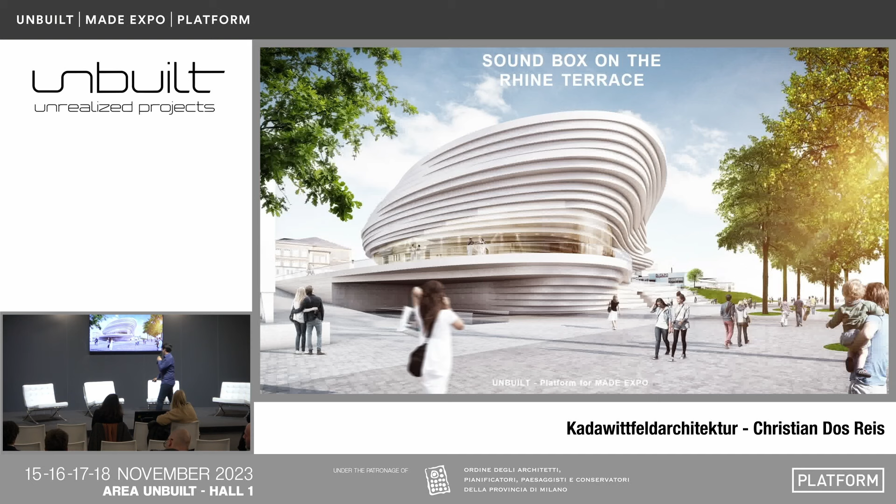My name is Christian Dos Reis. I work at Kadawittfeldarchitektur, and I'm very excited to talk to you about one of our unbuilt projects, one that's also near to our hearts. It's the Soundbox on the Rhine Terrace.

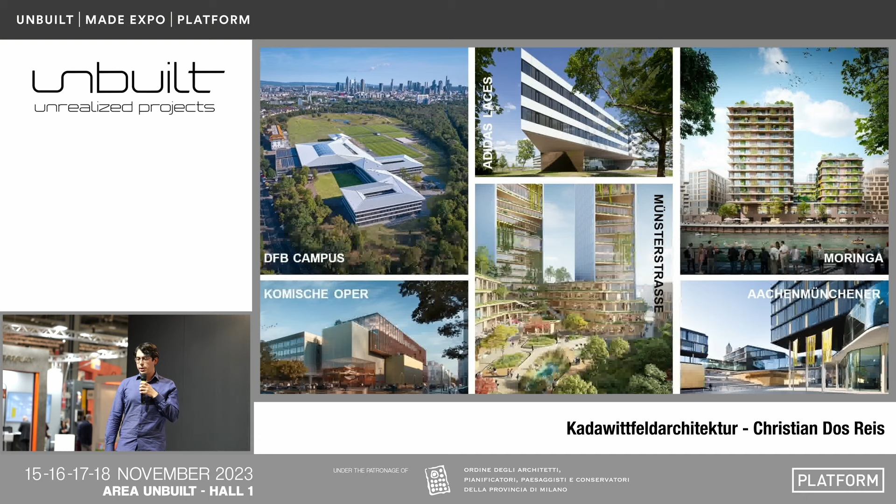Before I start, I'd like to talk a little bit about our office. We are a German-based architecture office founded in 1999 in Germany and Austria. We have grown to over 180 employees in locations in Aachen, Berlin, Munich, and more recently also in Cologne. Our project portfolio spans a variety of typologies, from offices and skyscrapers to educational buildings and schools, and also many cultural buildings.

One of our most recently completed projects is the DFB campus, facilities for the German Football Association in Frankfurt, as well as right now in planning the Komische Oper in Berlin, an opera concert hall.

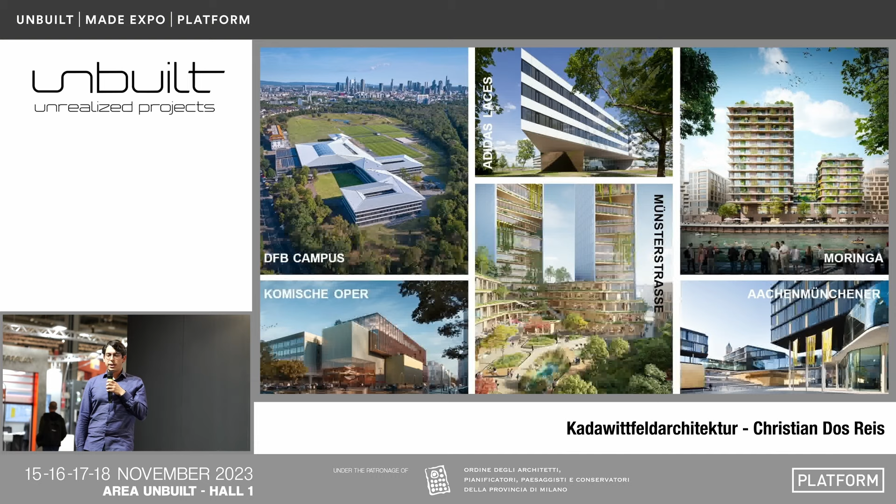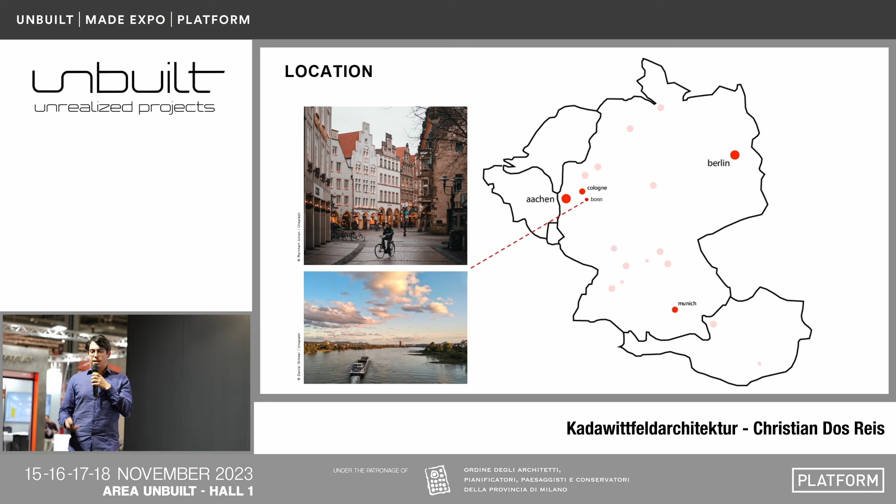In the thematic of cultural buildings and concert halls, I'd like to present the Beethoven Concert Hall in Bonn. Bonn, during the Second World War, was in West Germany, and this was the capital of West Germany, while Berlin was the capital of East Germany. It is located close to Aachen and Cologne, so many of you may have visited already, as well as the Rhine that flows through the city. It is also the birth city of Ludwig van Beethoven, which thematically is the point of the concert hall.

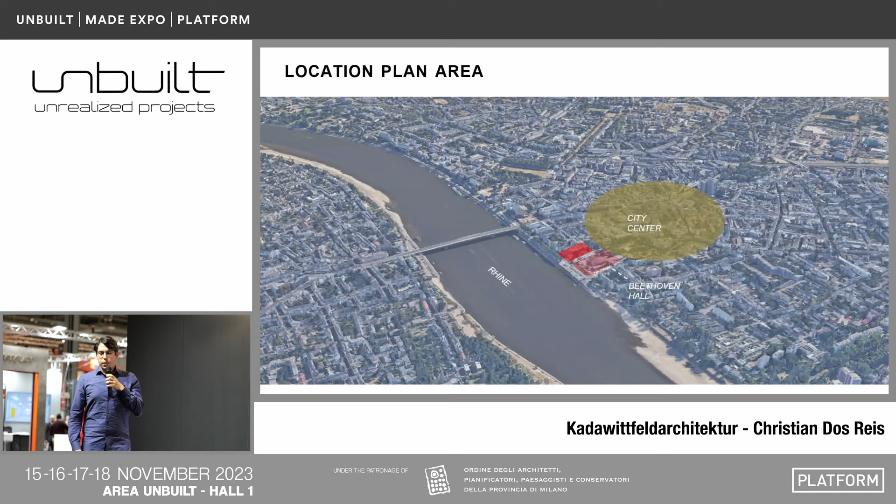I want to talk a little bit about the plan area and the project and the competition itself. The competition was set for 15 architecture offices internationally and was written out in 2014, divided into two phases. It took place in Bonn, close to the city center, and on the red area you can see is our plan area right next to the existing Beethoven Hall. Right next to it is flowing the Rhine River.

Interestingly enough, on the area we have the Rhine level, the shore level, and the city level, which have weathered several floods in the 1990s as well as in the 1800s, where the water rose above 5 meters.

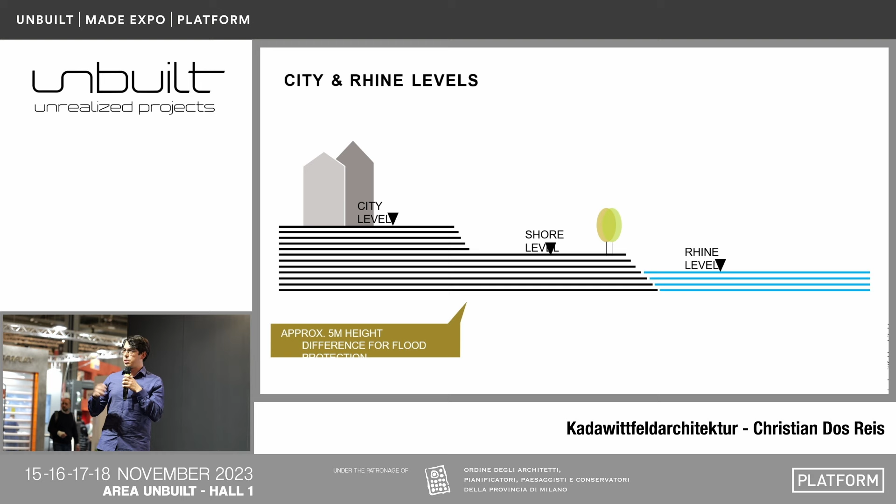So you can see the existing Beethoven Hall to the right, the plan area to the left, as well as the avenue that runs parallel to the Rhine, and the Kennedy Bridge that connects the eastern part of Bonn with the western city.

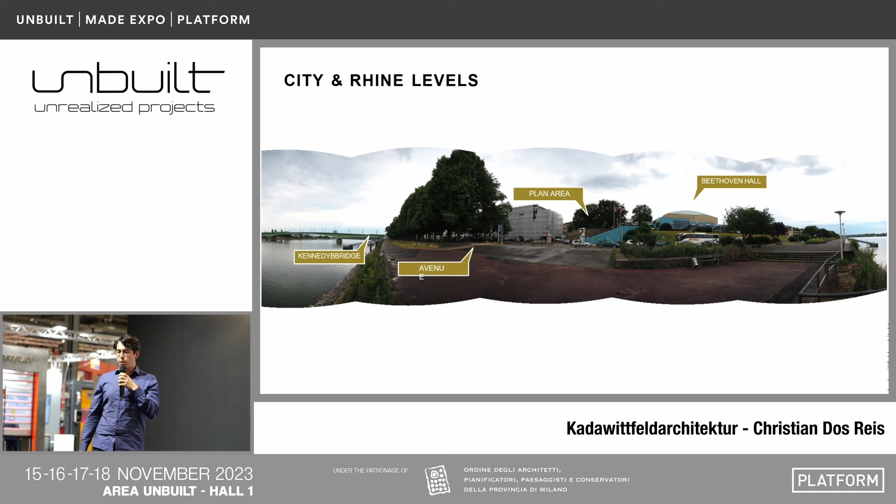Not to confuse, on the right we have the Beethoven Hall built by Siegfried Wolske, as well as the landscape planning done by Heinrich Raderschall. It was constructed and finalized in 1959 and went through an extension period in which they added seminar rooms to the left of the Beethoven Hall.

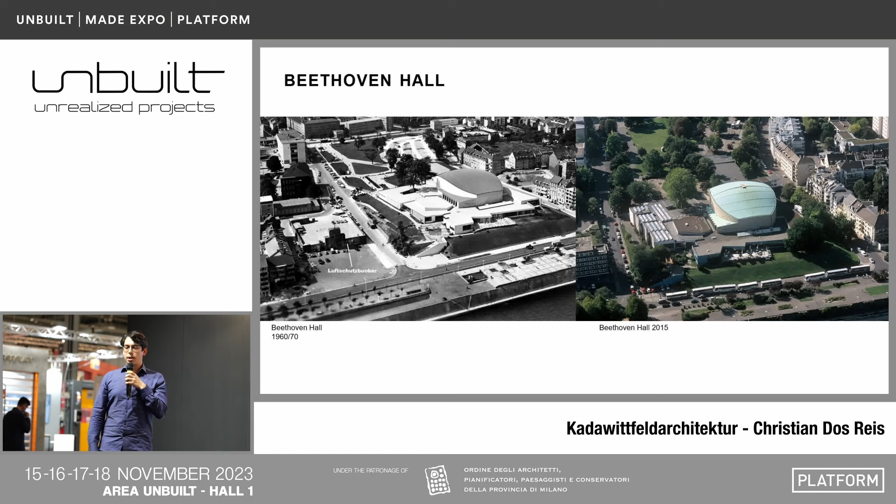On the left-hand side, where the plan area is situated, there used to be a bunker, which was then overbuilt. It was part of the competition as well to see how we can deal with a basement that used to be a bunker.

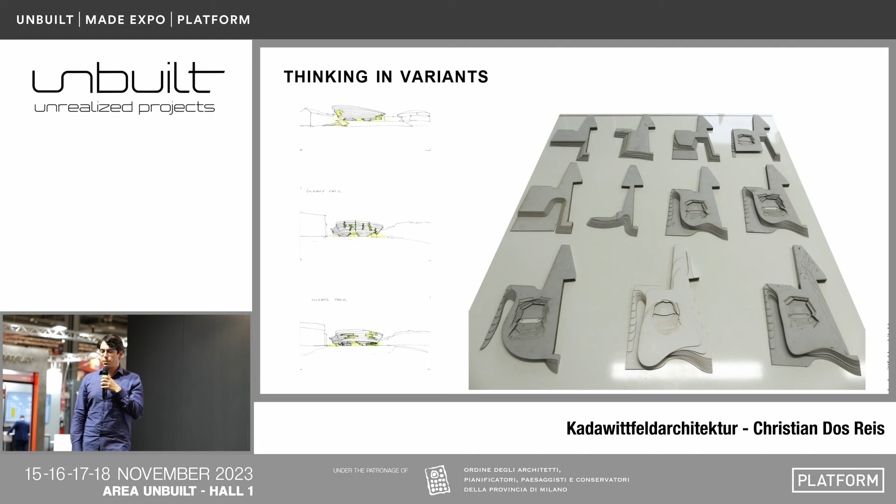For us in the office, we started relatively early with sketches and building models to try to find out what's the most suitable landscape to carry on from the existing Beethoven Hall. That brought us also to start mocking up the facade in model studies.

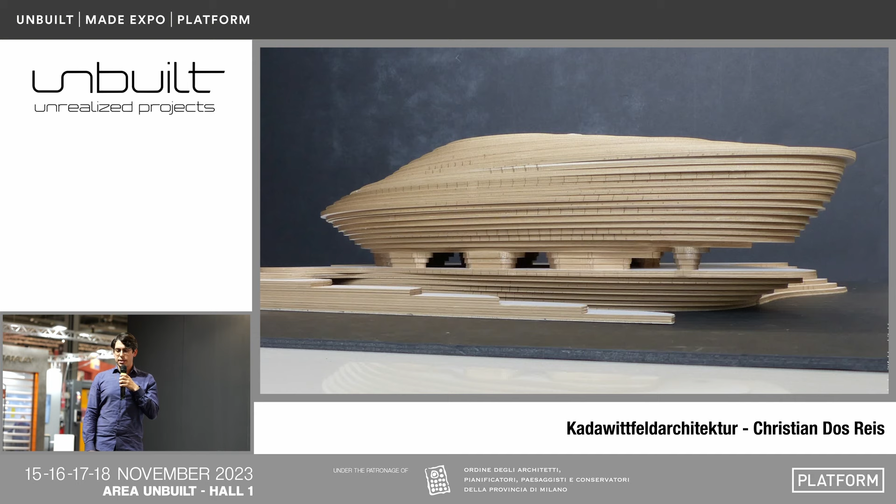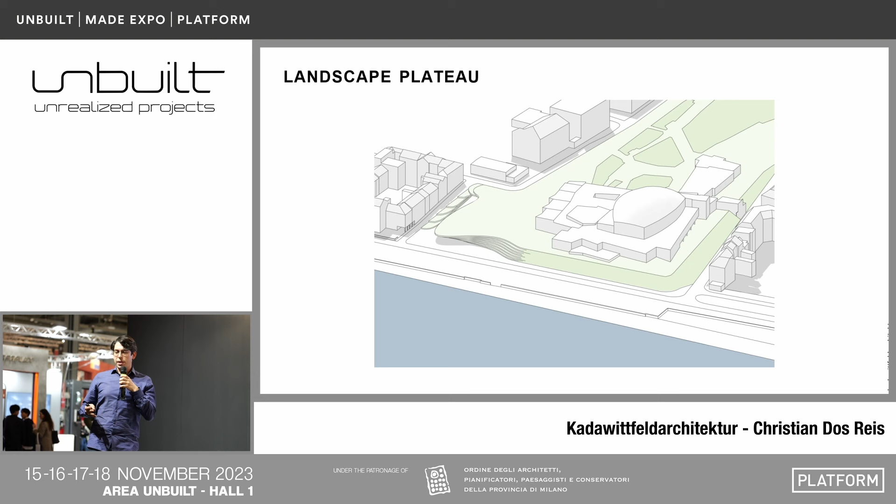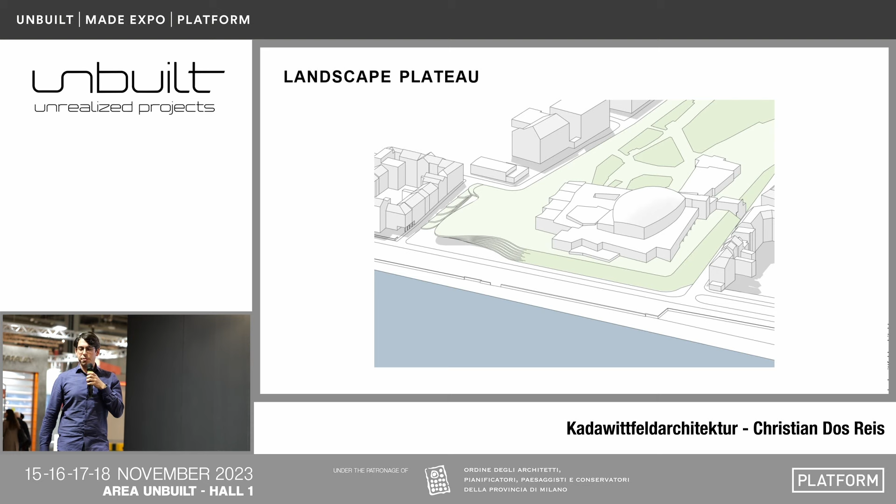Of course, as it being a concert hall, it's very important to know how you set a building that is respectful of the height differences, once with the Beethoven Hall to the right and a residential area to the left. So we had the idea to use the Greek amphitheater as an inspiration and set the concert hall down below, so that if you look at it from the avenue area, the concert area where the instruments would be playing is actually at the same level as the avenue and the riverbank.

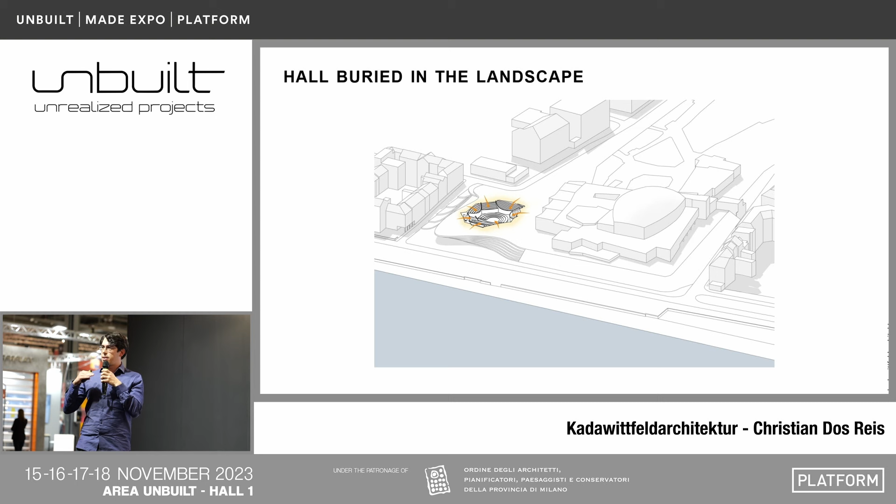So this is what it looks like in this scheme. You have the landscape that plays on top of the plan area, the hall that gets inlaid into the ground, as well as the shore and the Rhine right next to it.

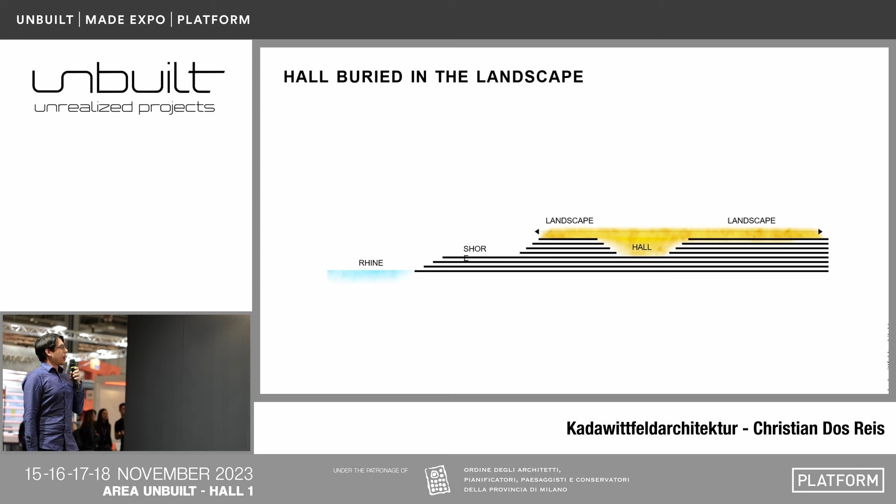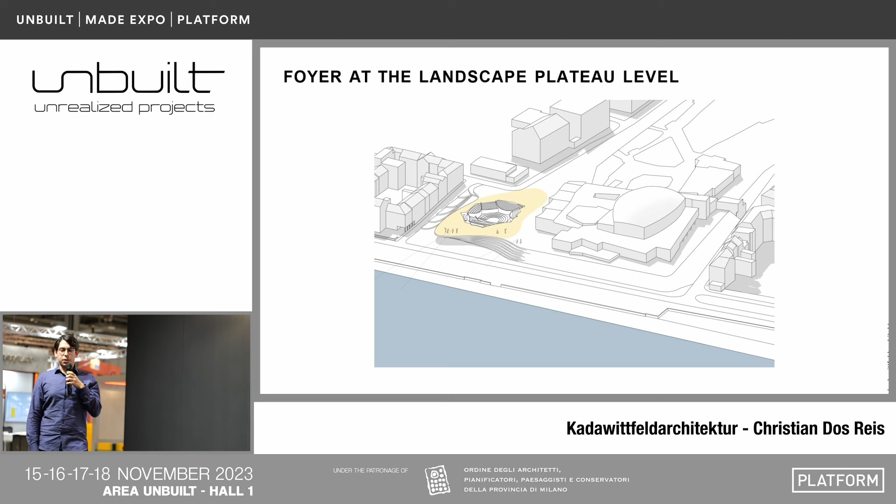This makes it possible to have a foyer that is integrated to the upper plateau level that is connected to the inner city of Bonn, as well as then having great sights over the river Rhine into Bonn itself. Now, of course, how do you close it all off?

We've played with relatively organic structures for the plateau itself. We took inspiration from the river and played a little bit with the musical instrument theme, taking from a string instrument the corpus and making it also as a sound body to put on top of our concert hall. This also looks like a conch or shell that has been formed by the river and taken its organic shape.

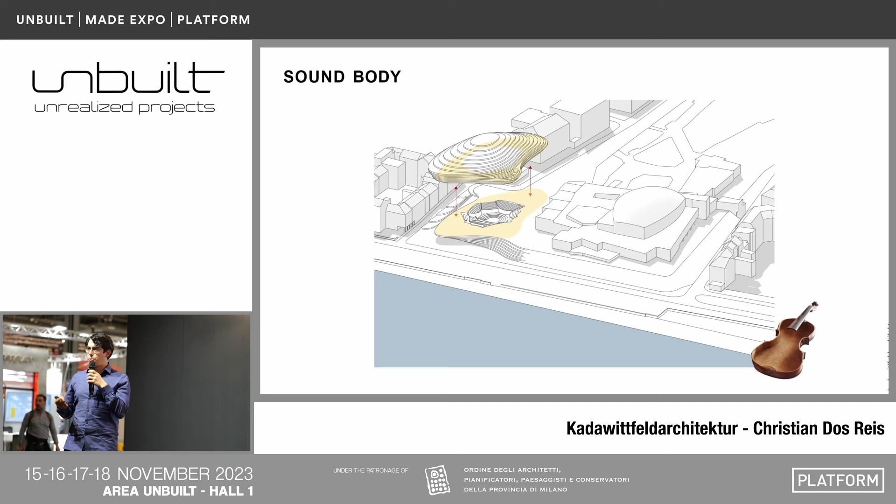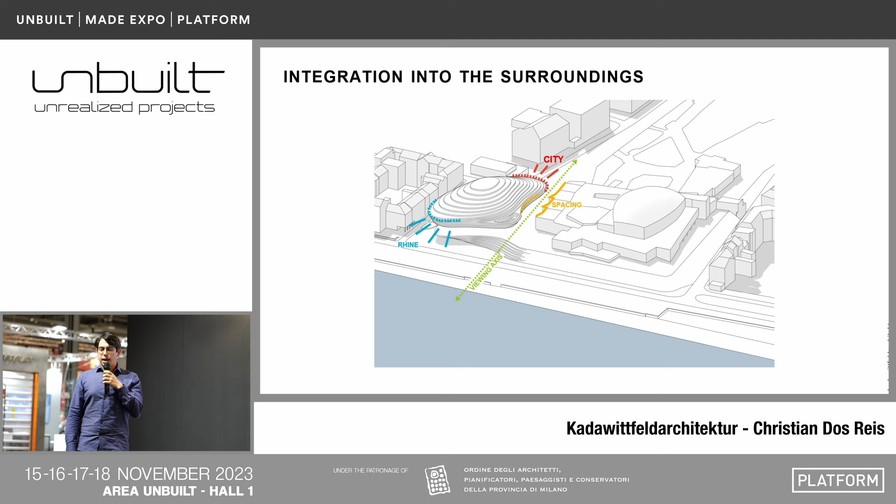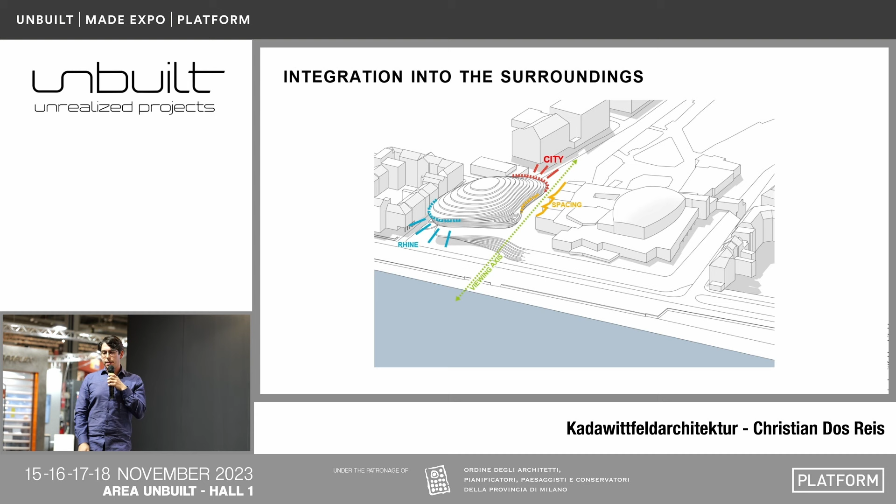This makes it possible to have exciting views from the building to the city, also a respectful space between the existing Beethoven Hall and its new concert hall. We keep a viewing axis to the inner city, as well as possibility of many viewing angles towards the Rhine, wherever you are inside the building.

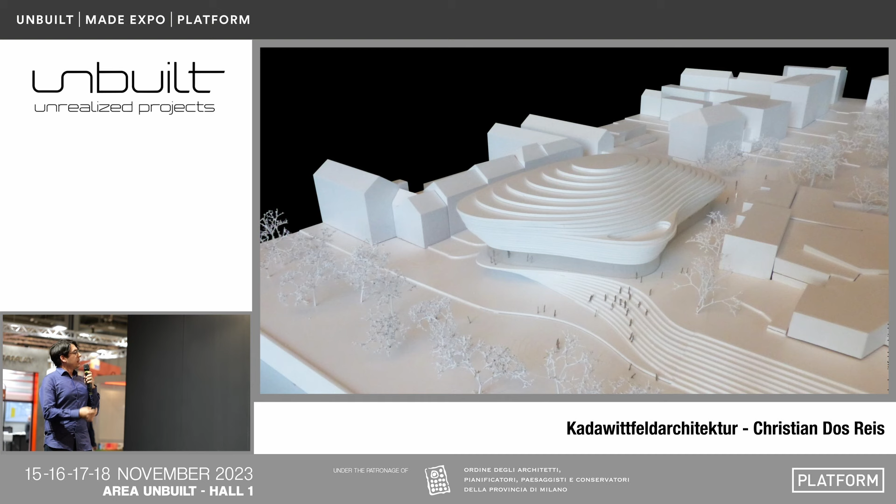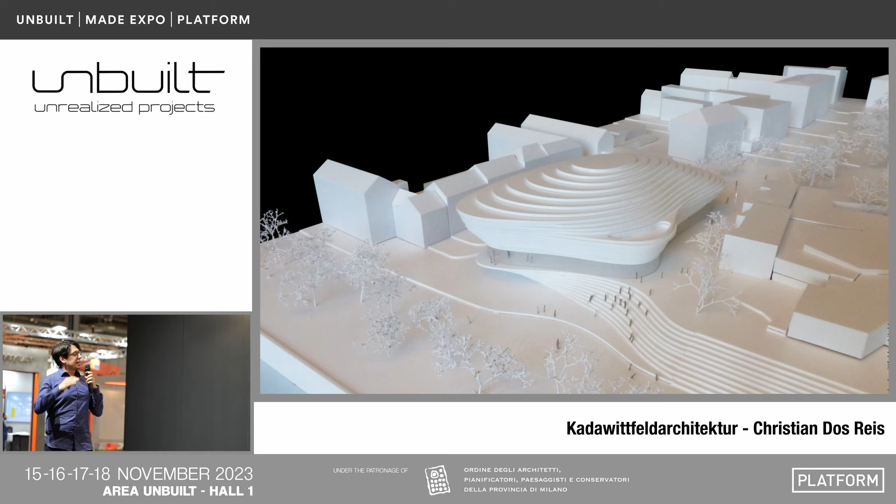So this is what it looks like in the model. You can already see, so if you are in the avenue, it lends itself to be very open. It's really a natural flow where people can enter the building and just go up the step-like staircase, where you are greeted first with a glass facade and then the building shell on top.

It also is very respectful with its surrounding buildings, as well as the Beethoven Hall that's right next to it, and it is possible to connect both. Of course, it wasn't realized, but we had plans for underground connections or elevators, which would all just make it possible to create one big musical campus in the theme of Ludwig van Beethoven.

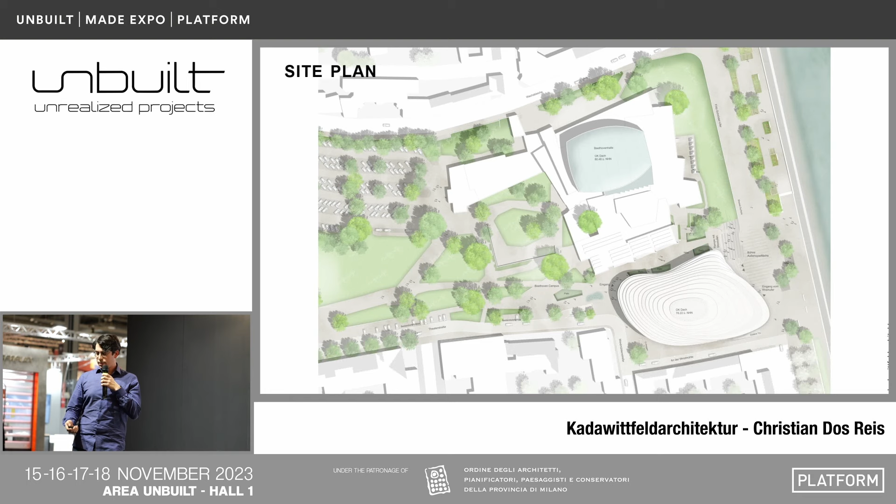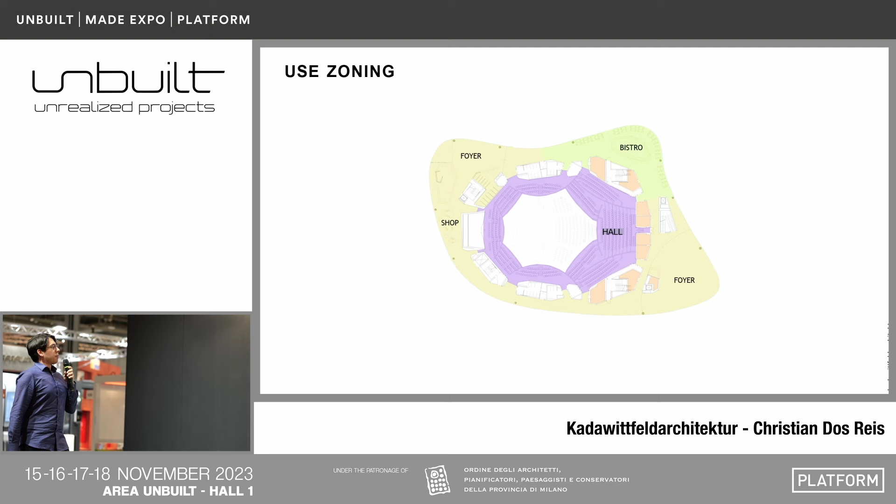One important aspect of the competition was also to have a very multifunctional building, and we decided to use its foyers that are surrounding the concert hall to be flexible. So you have the possibility of having foyers that can be smaller, more intimate concert areas, a bistro area that is flexible to be put wherever the client would desire.

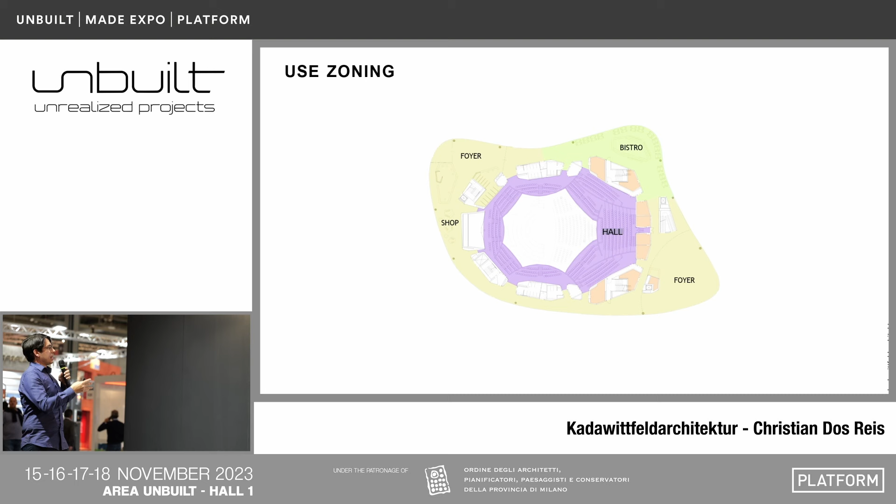And we would arrange all of the important facilities for wardrobe, artists, instruments, and technical facilities as close as possible to the hall. So you get a very concentrated building that is actually well optimized.

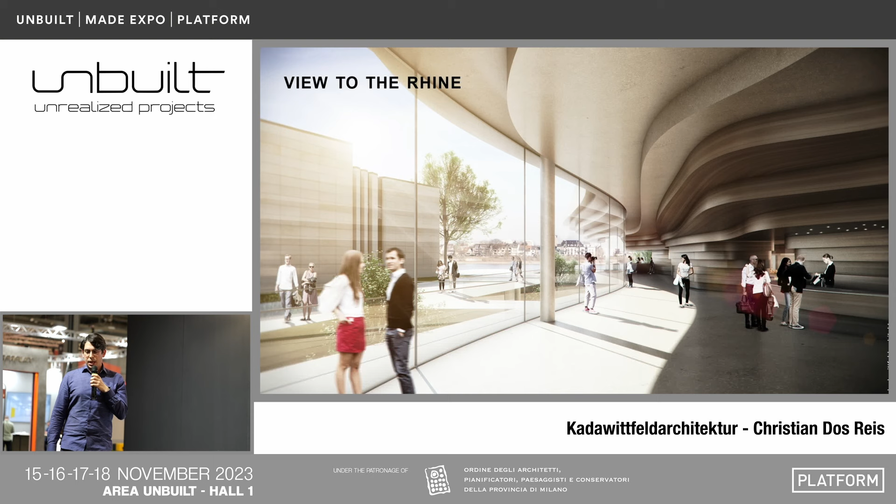This is what it looks like from the inside. So we've just entered the building, we've passed the ticket shop, and on the right-hand side we have the wardrobe entry. The language of the facade is also reflected on the inside.

You have the stepping stones now inverted that were building up on the outside, now building down. And wherever there's an entry necessary to go either to the concert hall itself or to the artist's room, the flow opens up for you to go into those rooms. And already on the side you can see an indication of the Rhine.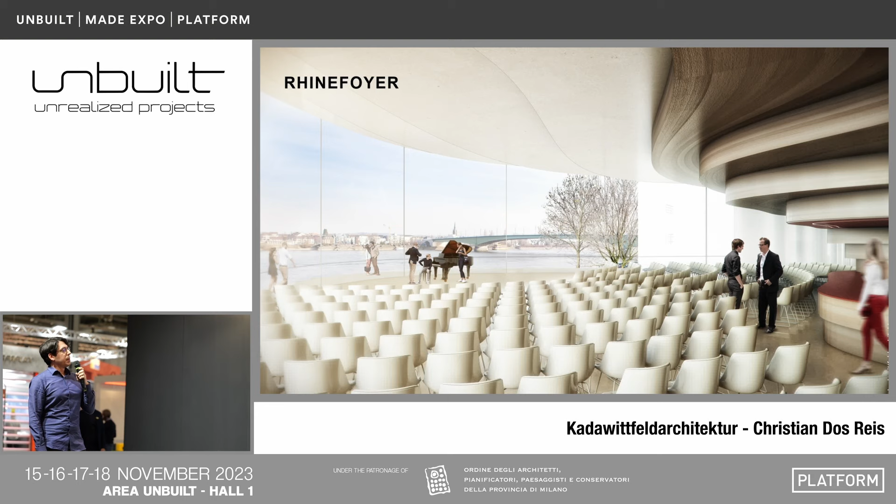And the deeper you go, if you flow around the concert hall, you get this view to the Kennedy Bridge, to the Rhine River, and of course again this multifunctionality of these rooms where you can put up to 100 people in these foyers, or make galas and dinner seatings, which is all possible.

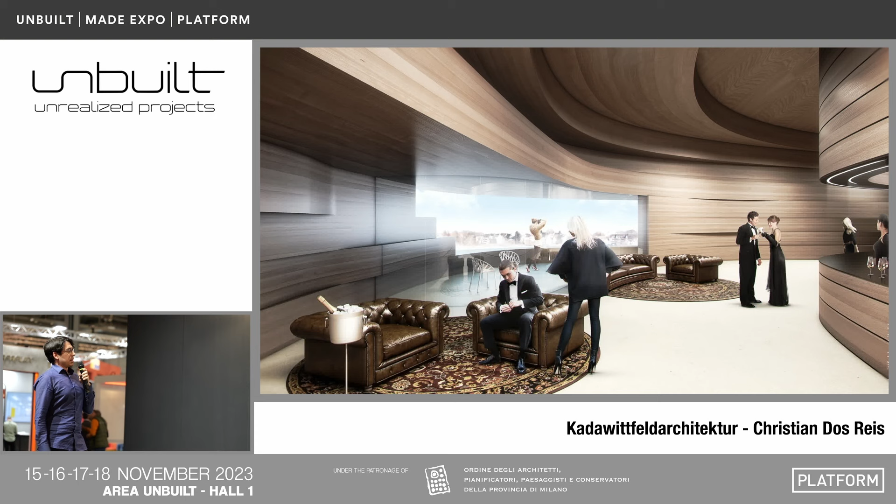And once you go up, this is the balcony that I just spoke of. We have the VIP area, in which you have the same thing, where this is the only area that has the balcony, but the flow itself just makes this room very nice just to be inside.

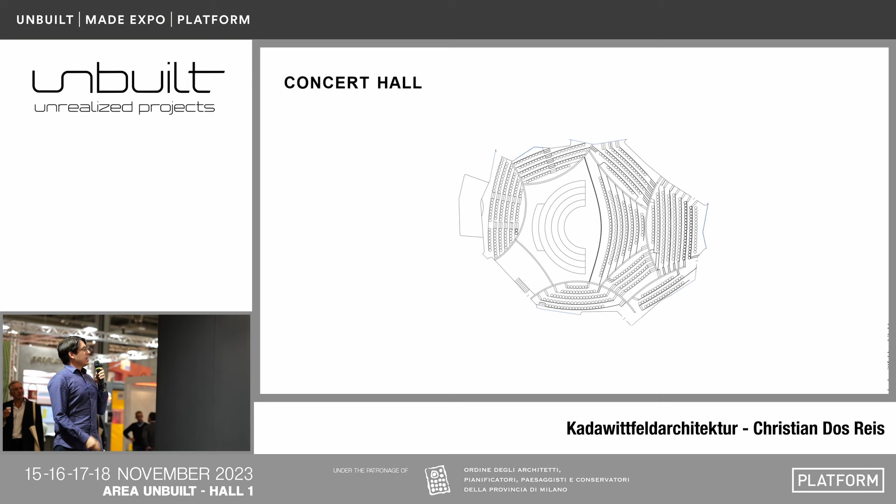Now, of course, for the concert hall, the most important thing is actually the concert hall itself, where the music is played. And we decided to go for a hybrid arena and shoebox structure that lends itself to be very small, but still have the possibility of a maximum seating in which everybody is surrounding the playing area in the middle.

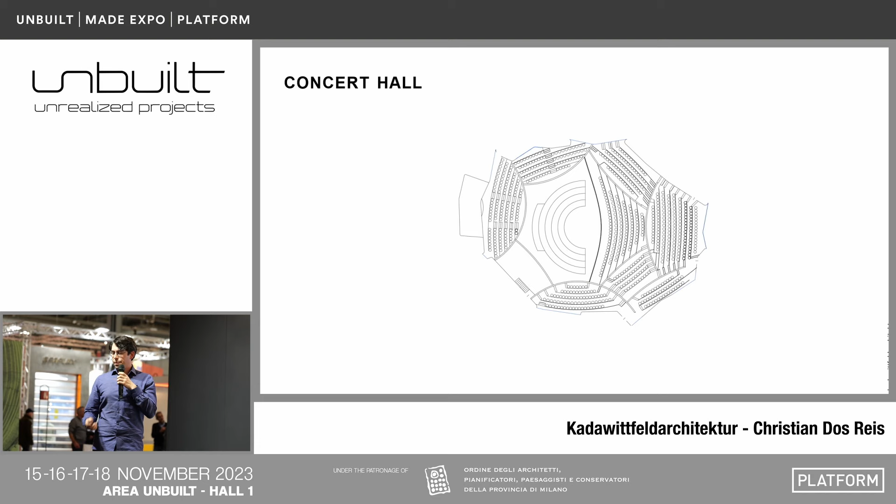In the second phase, when we were selected amongst three to carry on with the design, we streamlined some of those lines. So the stepping stones that you just saw were a little bit more streamlined to reflect the acoustics a little bit better, and we added a few elements to it to improve the sound and the acoustics.

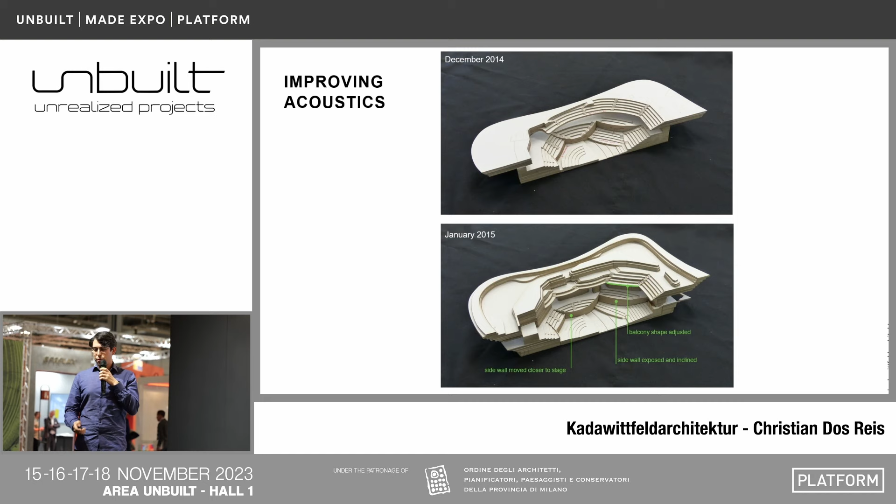For that, we worked a lot with models in order to find out which reflection areas we could improve, based on the 3D model we created now over 10 years ago. We also added some acoustic language and found relatively easily that some of the areas we had in the first phase weren't really reflecting the sound where we needed it to. The adjustments were made thanks to this method. We worked with Nagata Acoustics as well as Nicholas Edwards, two specialists in acoustics on this project.

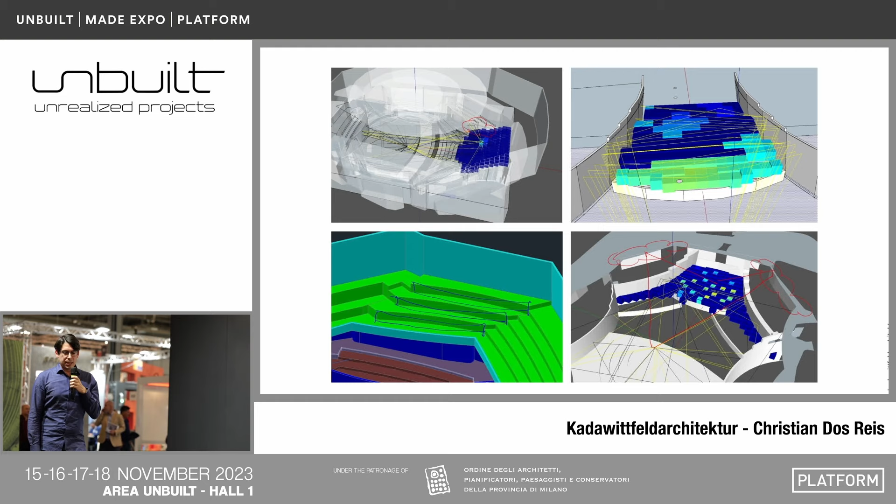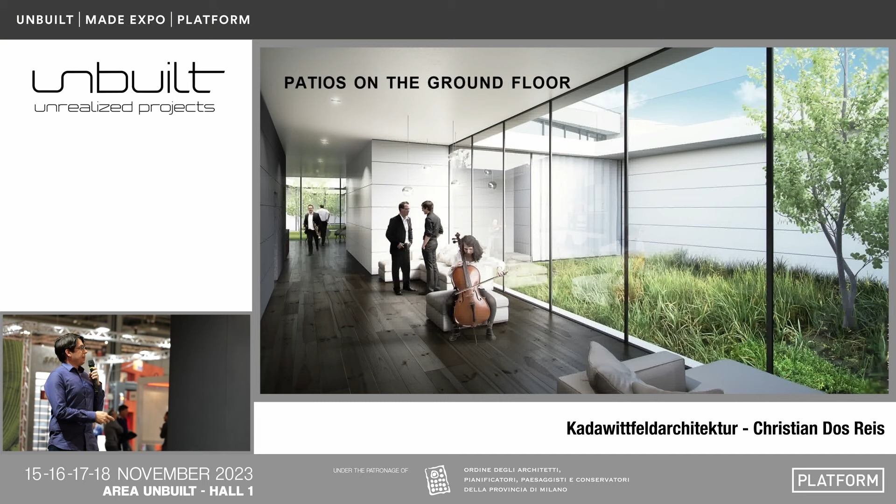On the side you have patios, directed towards the existing Beethoven Hall as a connection element. We decided to bring a little bit more natural light into the building, where the artists would enter their rooms, but also create smaller areas where they can train or play before they go to the concert, as well as small meeting and coffee points.

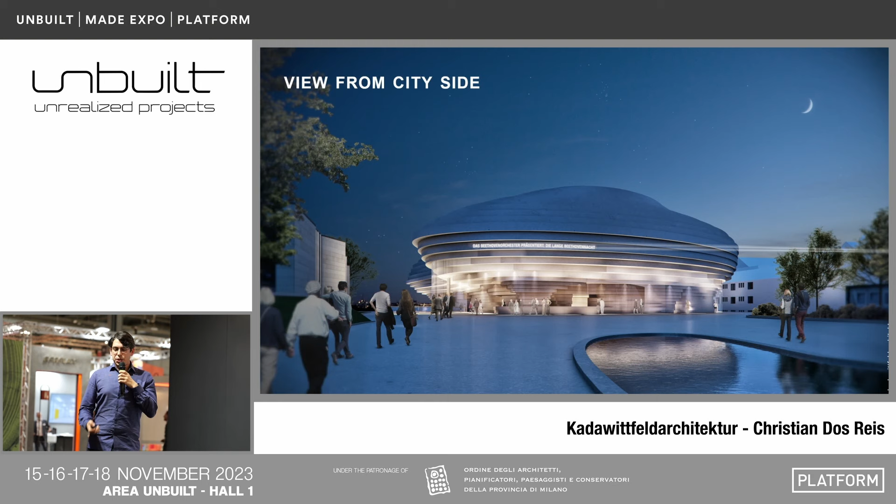Now, the building wasn't realized—it wasn't built, sadly, that's why it's here. At the end of the second phase, three finalists completely finished their drawings and all of their material, and we gave it in. That was it. It was David Chipperfield, it was us, and it was Valentiny.

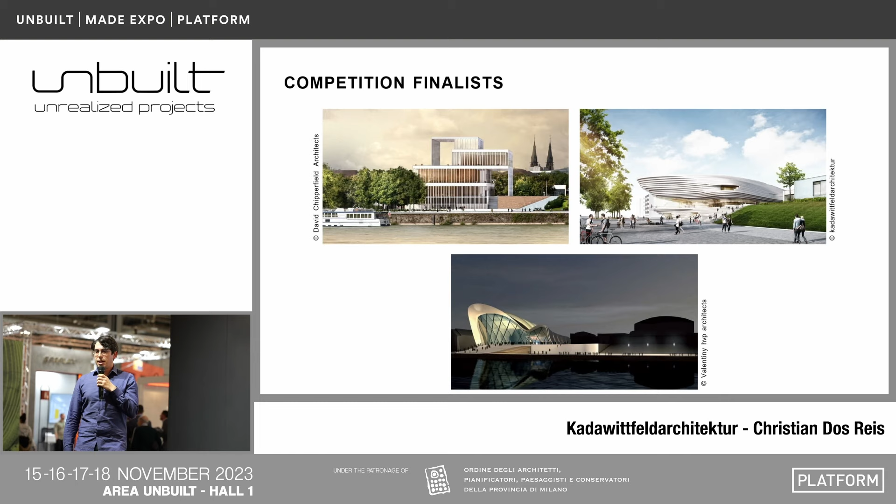Then the sponsors of the competition decided to abort the whole thing. We were this close to finishing up this competition and maybe winning, and then everything fell apart, either through financial issues or disagreements with the city of Bonn on how this was supposed to be built. This happened in early 2015, and of course for us was a very sad moment, but we just carried on, and we thought we learned a lot from this. We managed to get many new contacts internationally, and learned a lot about how to build a concert hall.

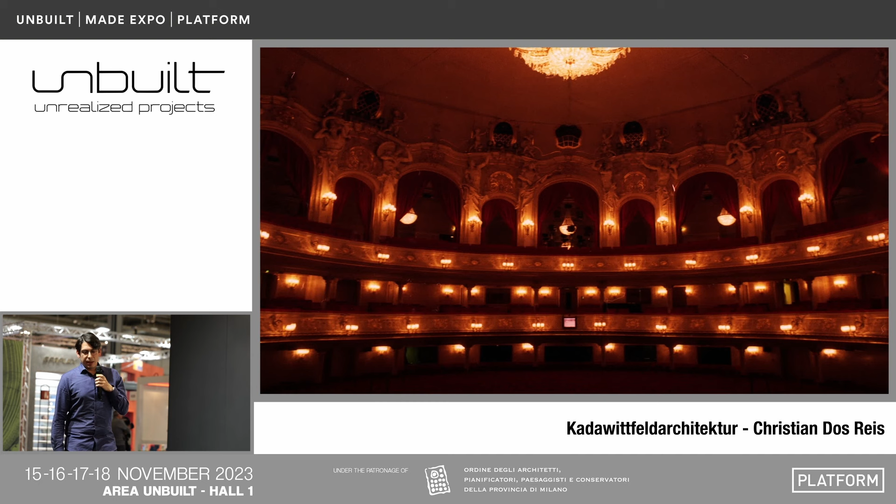But funnily enough, that's not the end of the story for the plot itself. The competition got cancelled, everything went flat, and we didn't hear anything from it anymore. After a few years, another competition was written out by an investor who had bought the plot and wanted to do something else with it. One option was to build a hotel at the site, and we participated in that competition and won it.

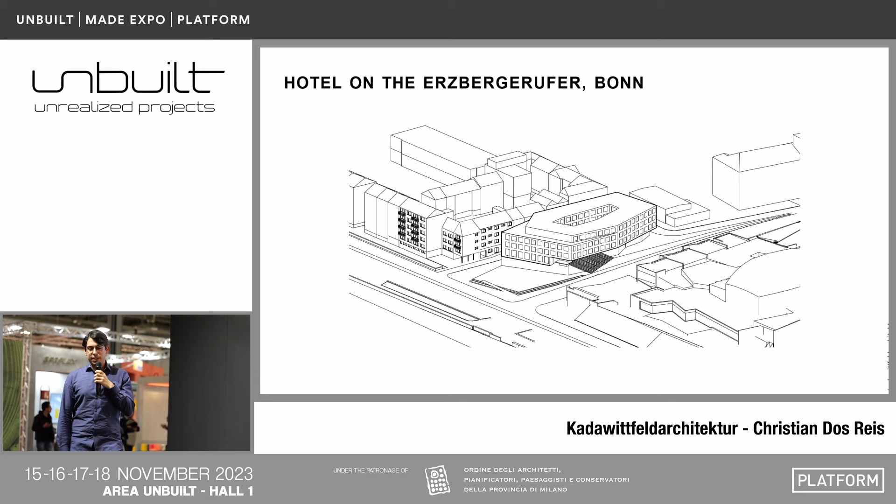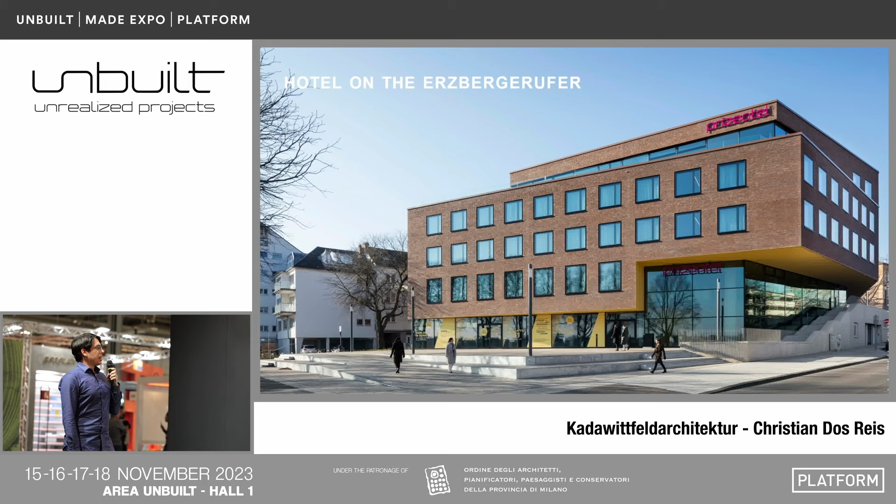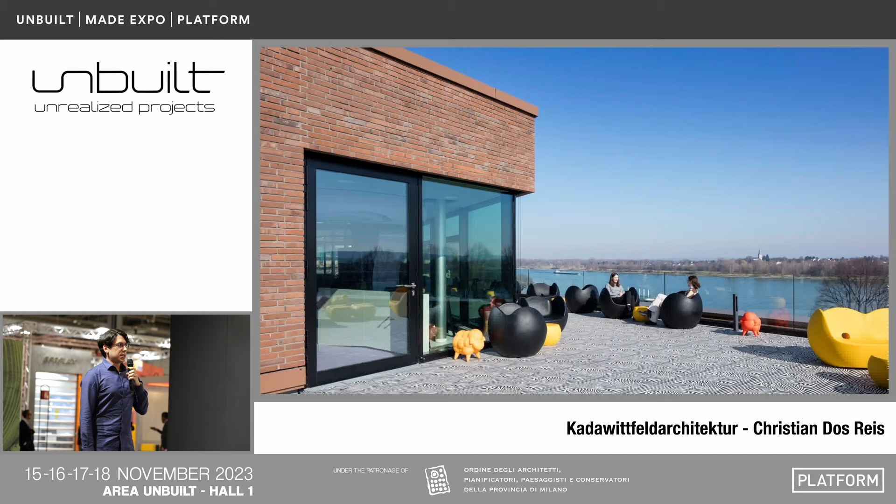This is the Hotel am Erzbergerufer, which is at the exact same location, the exact same plot. We managed to build it now over the last few years—it was realized in 2021. It delivers some of the promises we made with the concert hall before, a relatively calm and nice experience with amazing views to the Rhine. Of course it's not a concert hall, but we're very happy that we did manage to still build something on the same plot where just a few years ago we had an unrealized project. That would be all from me. Thank you very much.